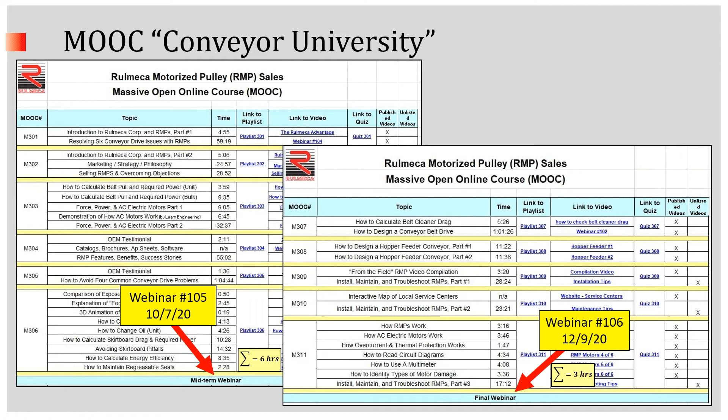That's one of our most popular videos. It's been watched tens of thousands of times. So we'll spend some time on hopper feeders. And then we will also go through what we call our install, maintain, and troubleshoot lecture. We'll have some highlight slides from that.

So the 7 items on our agenda are conveyor belt tensions and required power, how to calculate that, belt cleaner drag and required power, how to calculate that, 2 segments on hopper feeder drag and required power, and a few comments on how to calculate hopper pressure relief, and then 3 segments on installation, maintenance, and troubleshooting of conveyor drives.

And of course, since we're a manufacturer of motorized pulleys, we'll be using motorized pulleys in most of our illustrations through the hour. We start with a peek at

a standard conveyor to explore tensions. The tensions which are most relevant to today's talk are TE, also called effective tension, and T2, also called slack side tension. We are using the CEMA historical methodology in today's discussion.

Our company, as you most likely are well aware, is an international company with affiliates in 24 countries. At our company, our group headquarters in Italy, the fellows have developed a new methodology for conveyor power calculations based on both the DIN for our European colleagues, DIN standards, and the CEMA universal method that's based on edition 7 of the CEMA design manual.

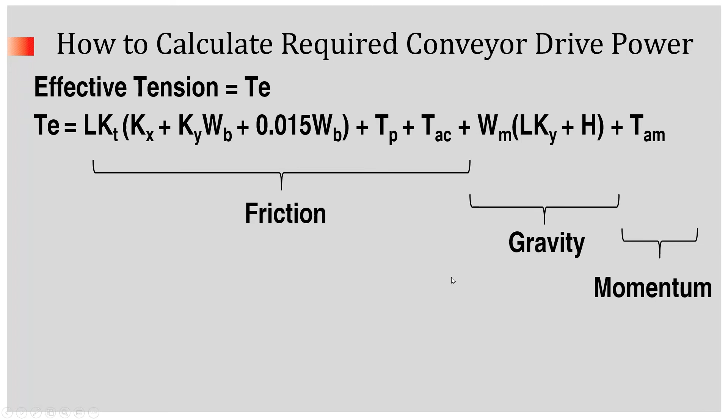Our program using the historical method is downloadable from our website. You can also have access to the universal method, which is an online portal type program available through the group anywhere in the world, and you can access it through our website.

Let's talk about T2, slack side tension, for the next couple of minutes. There are two types of T2 that need to be computed, one of which is T2 required to prevent slippage of the belt on the pulley surface.

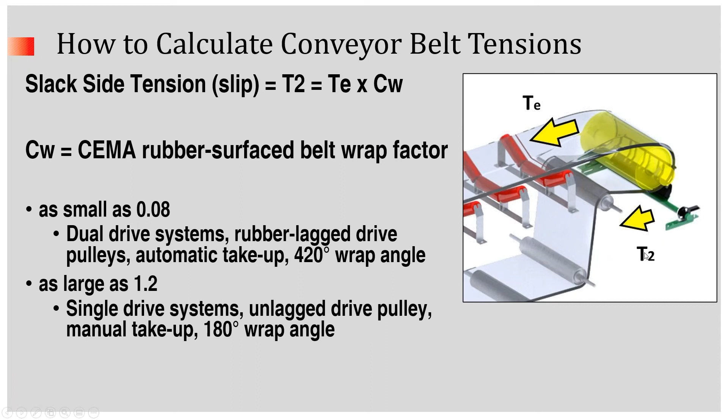This is the simplified equation here: effective tension times the CEMA factor. The CEMA factor can vary from a number as small as 0.08 to as high as 1.2. I won't go through the trouble of explaining all of that, but the CEMA methodology lets the user of the program be aware of what slack side tension is required to prevent slippage.

The other equally important slack side tension to compute is the one required to resist sag. You cannot allow the conveyor belt to sag beyond a small amount between the troughing idlers. Typically, the area of least tension is in the loading zone, and that's typically near the tail of the conveyor, as pictured here on the left.

If the sag is too large, then the problem would be spillage in that zone, and it could either be a nuisance, where you'd need to clean it frequently, or a disaster if it completely fills the tail section and stalls out the belt. So it's essential to calculate

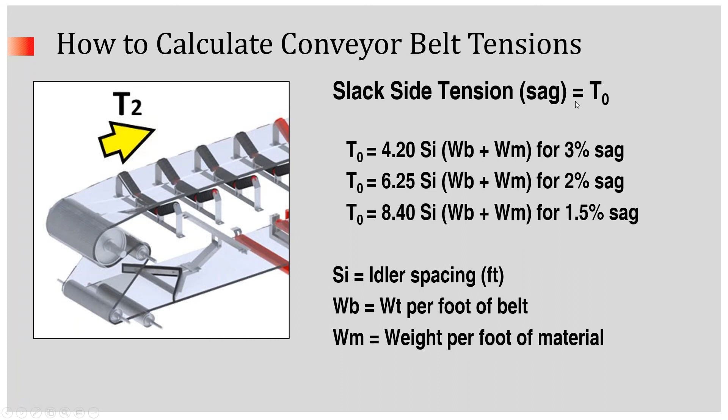T0, the tension required to prevent sag, and T2 is then developed, as you can see here. That's the sum of T0 plus the weight of the carrying and/or return strand of the belt for a sloped conveyor, and the tension required for the empty belt to overcome return idler friction. You either add or subtract depending upon whether your conveyor has an incline or a decline.

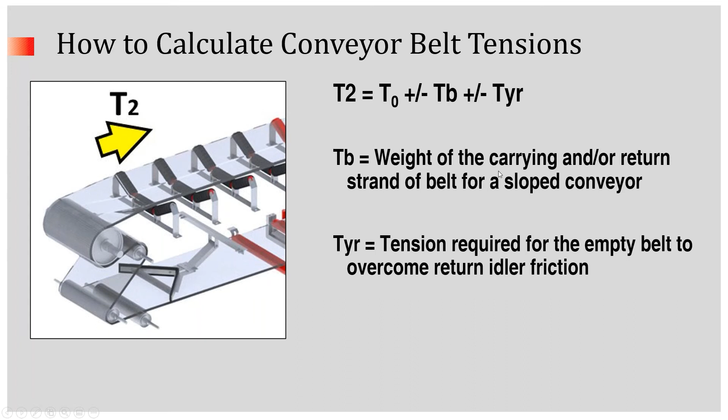Once we know each of the two T2s, the one to prevent slippage and the one to prevent sag, we select the larger of the two as governing, and we use TE to calculate power, as you can see in the top equation here. We know that TE, effective tension in pounds, multiplied by V, belt speed in feet per minute, comes out to be a certain number of foot-pounds per minute.

And since we know 1 horsepower equals 33,000 foot-pounds per minute, once we have the product of these two numbers, we know how much power to supply in the drive system.

To finish the discussion on the tensions, we select the larger of the two. Let's say, for example, T2 required to prevent slippage is 1,000 pounds, and T2 required to resist sag is 800 pounds. We would select the T2 of 1,000, and we would select a counterweight, which in this example would weigh 2,000 pounds, so that we can have equal and opposite force to the pulley in the counterweight take-up of 1,000 pounds.

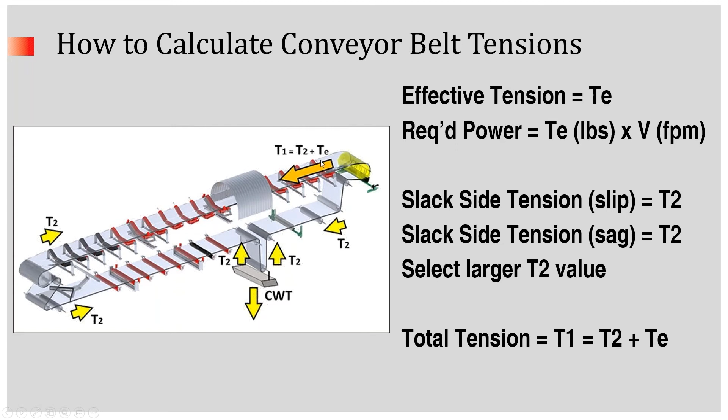So having 1,000 pounds scattered throughout the conveyor helps us with our slippage and sag problems. And we need to remember, when calculating T1, that T1 is the maximum tension in the conveyor belt. On an inclined conveyor such as this one, it's near the head. T1 is the sum of slack side tension plus effective tension.

Now for a couple of minutes, let's discuss one component of effective tension: the drag required to overcome belt cleaner pull. CEMA recommends the equation of the CEMA factor multiplied by the width of the blade times the number of blades.

They suggest that factors from as small as 2 pounds per inch of blade width to 14 pounds per inch of blade width could be used. If unknown, CEMA recommends using 5 pounds per inch of blade width.

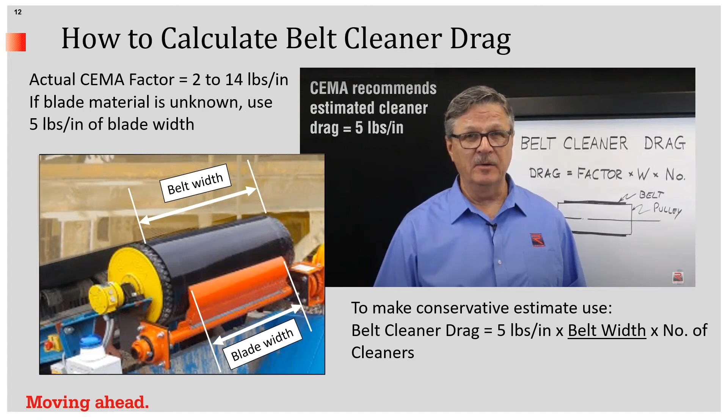Rulmeca suggests that to be conservative, you simply use 5 pounds per inch and multiply that against the belt width. Rather than, in our example on the left, you can see what might be a 30-inch wide belt and perhaps a 24-inch wide belt cleaner. Let's simplify things and multiply 5 pounds per inch against 30 inches of belt width, and multiply that product against the total number of cleaners installed. That's a simple and safe way to come up with the amount of drag you need to overcome in your drive system. Now let's turn our attention to 4 types of hopper feeders.

As I said, these hopper feeder videos, since we posted them a couple of years ago, have gotten thousands of views. So it seems there's a requirement for people to get guidance on how to do a proper calculation of a hopper feeder conveyor drive. We'll look at material storage, material blending, material receiving batch loading, and material metering.

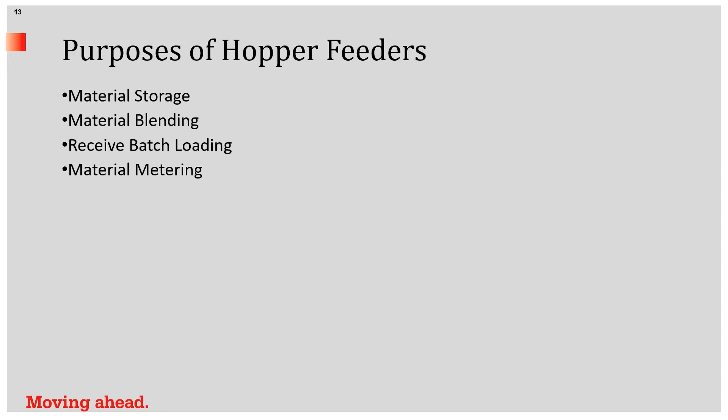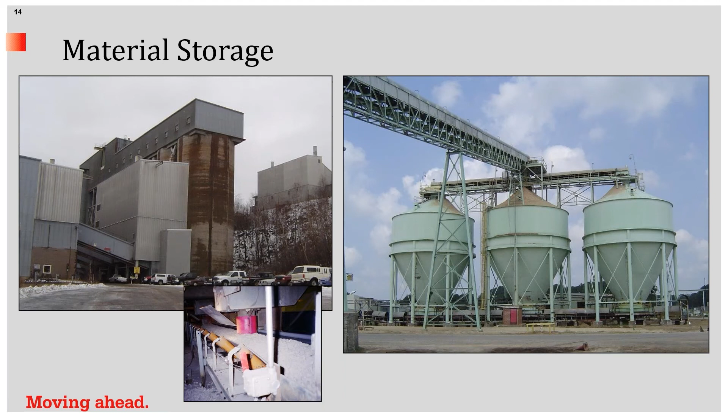These examples on the left show iron ore, and on the right, wood chips. The silos on the left and the hoppers on the right are simply vessels to contain material so as to have it on hand when it's needed in the process.

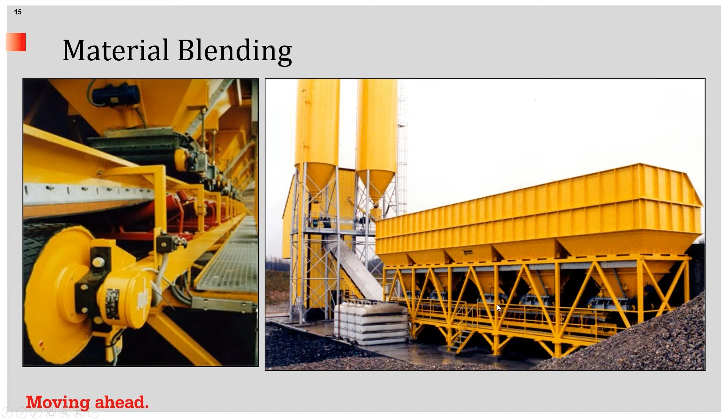This example shows material blending, and this is the sort of thing that might be seen in a typical batch plant along the side of a highway at a construction site. The various pant legs in this particular hopper might contain various grades of aggregate, different sizes of aggregate, different types of sand, and so forth, all of which can be blended together to make the recipe required to build the road.

And here we have examples of how a hopper might be used to receive batch loading. The example on the upper left shows the hopper is simply the intermediary between the batch unloading of this barge using a clamshell and the continuous takeaway by the dock conveyor. The hopper serves as the intermediate spot.

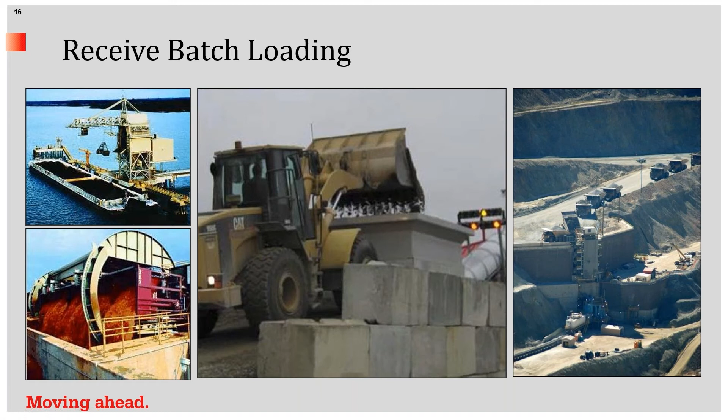Here's an example of a rotary rail car dumper dumping batches onto a continuous takeaway conveyor which is continuously withdrawing material. Likewise, a front end loader and truck dumps in a mine.

And finally, material metering. A hopper may be used to provide material at various rates. In this example, we have 2 motorized pulleys in service, each on a conveyor, which is tied in with an ultrasonic probe and a variable frequency drive. The ultrasonic probe sends a signal to the variable frequency drive, which then

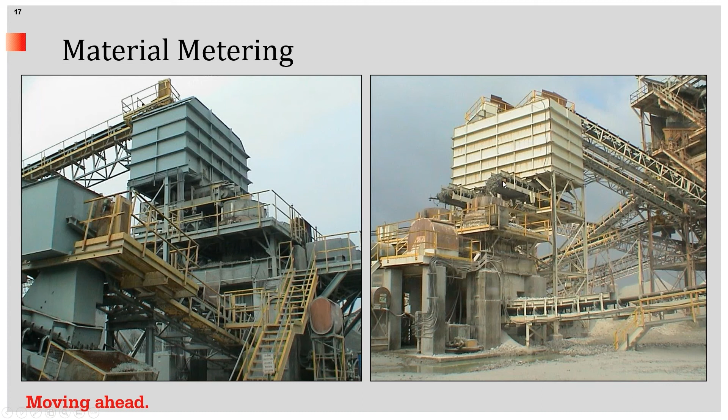in real time either speeds up or slows down the conveyor belt so as to choke feed the crusher. For optimal performance, the crusher is supposed to have the material at a certain level, and by metering the material from beneath the hopper, the operator can accomplish that.

Now let's draw an important distinction between two types of flow. One is continuous flow, and the other is metered flow. So I asked the question: if conveyor A is feeding conveyor B continuously, and conveyor A is handling 1,000 tons per hour with a belt speed of 100 feet per minute, and conveyor B has a belt speed of 200 feet per minute, what is the output? Is it 2,000 tons per hour?

The answer is no. The answer is 1,000 tons per hour, because in a continuous flow situation, the rate of material coming in equals the rate of material going out, regardless of the belt speed of either belt.

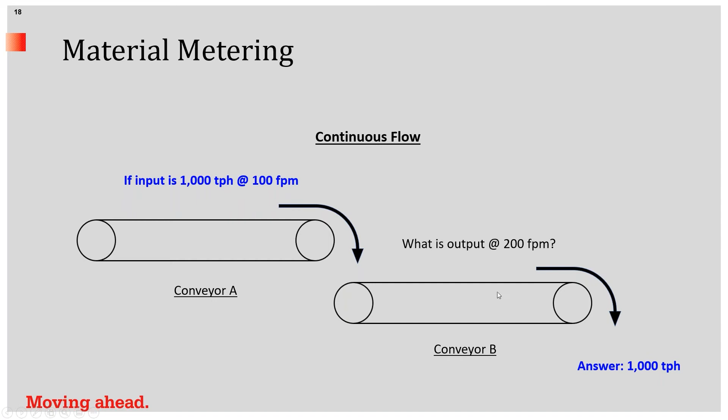However, when we look at flow from a metering hopper, assuming the output is unrestricted, if we start with an unrestricted output of 1,000 tons per hour on a 100 foot per minute hopper feeder conveyor, what would be the material handling rate if we speed up that conveyor belt to 200 feet per minute? And the answer is 2,000 tons per hour.

The handling rate is linearly proportional to the belt speed within certain considerations. If you make it 10,000 feet per minute, obviously it's not going to work. But within the normal parameters of conveyor design, conveyor handling rate and belt speed are linearly related.

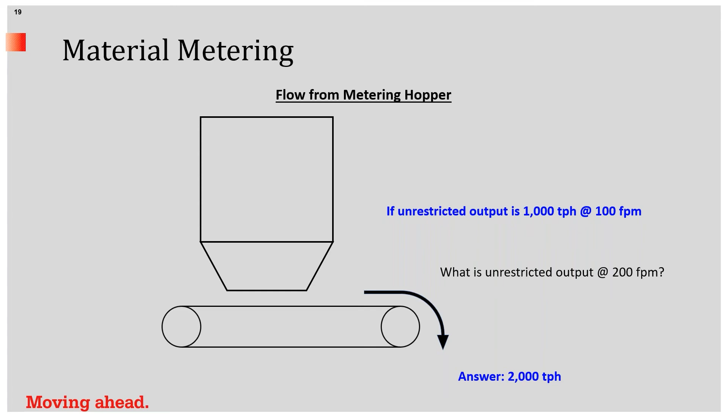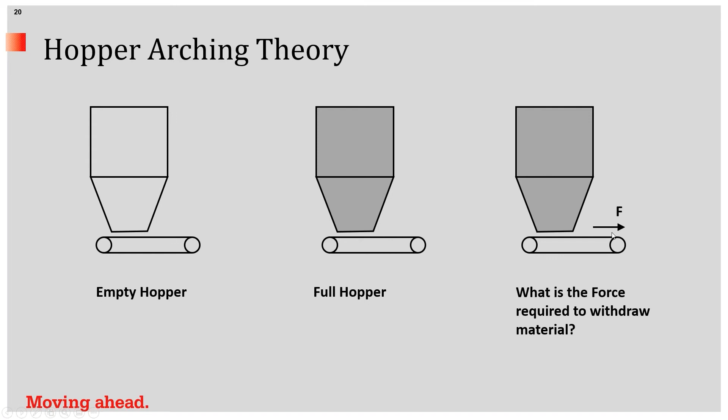Now let's take a more careful look at how we would come up with the force required to overcome the drag in a hopper. On the left, we have an empty hopper. In the center, we have a full hopper. Our objective is to calculate F, the amount of effective tension that the drive needs to supply to the conveyor belt to overcome drag within the hopper.

In order to accomplish this, it's essential to understand the concept of arching theory. Arching theory tells us that we only need to concern ourselves with the active volume of material in the hopper, assuming that all of the rest of the material will be self-supporting. In other words, the inclined hopper walls are going to be holding up most of the material.

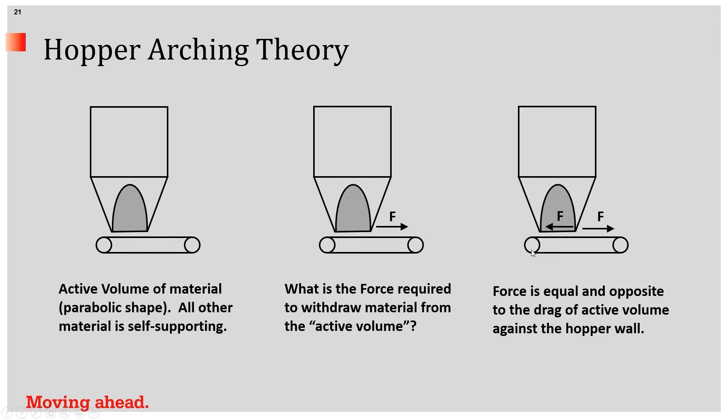So what is the force required to overcome the material in the active volume? Let's have a look at how to calculate that. We simplify this technique by saying, rather than attempting to calculate the volume of a parabolic shape, we simply approximate that shape with a prism, meaning a rectangular shape.

We say that the volume of the prism is defined by its width, its length, and its height, and we always assume that the height is 3 times either the width or the length, whichever is smaller. Once we calculate this active volume in cubic feet, and we know the bulk density in pounds per cubic feet, we know the weight of the active volume.

And then comes the secret sauce. We simply apply a factor of 0.5 to approximate the cutting force required to overcome that active volume. So first we calculate the volume, determine the weight by multiplying by bulk density, and then multiply that weight by 0.5 to come up with, in imperial units, the number of pounds that the conveyor drive must supply to overcome the drag.

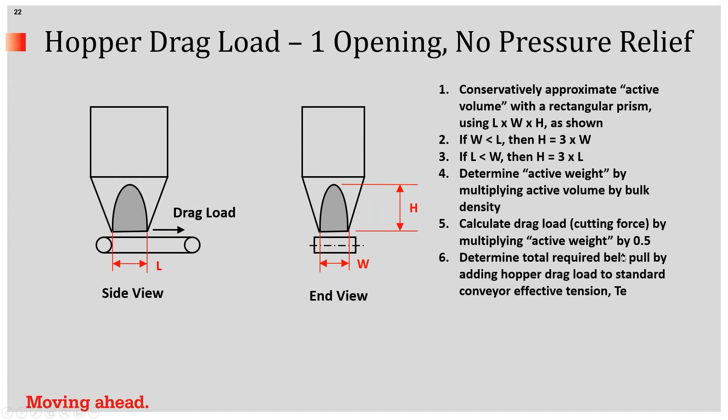A very important concept to understand is pressure relief. It is possible to decrease the amount of power required to drive a hopper feeder conveyor simply by restricting the opening. Of course, it would be a problem if it was restricted too much and it would plug, so a certain amount of reason needs to be used when figuring this out.

It's exactly the same as before. We simply assume that the length equals the length defined between the hopper edge and the tent, and the width, in this case with one tent installed, equals the width without the pressure relief, and the height is simply 3 times either the length, L prime, or W, whichever is smaller.

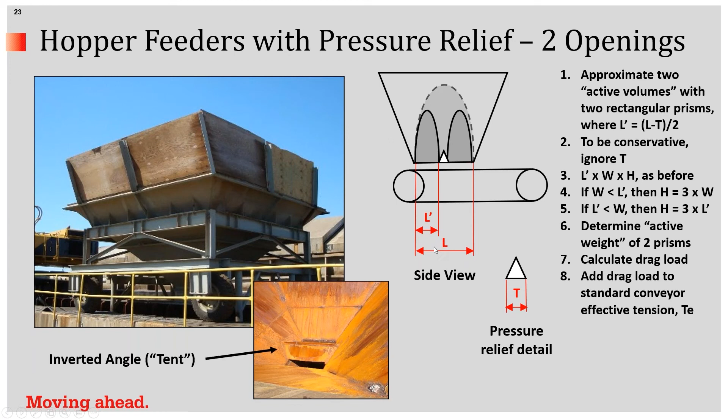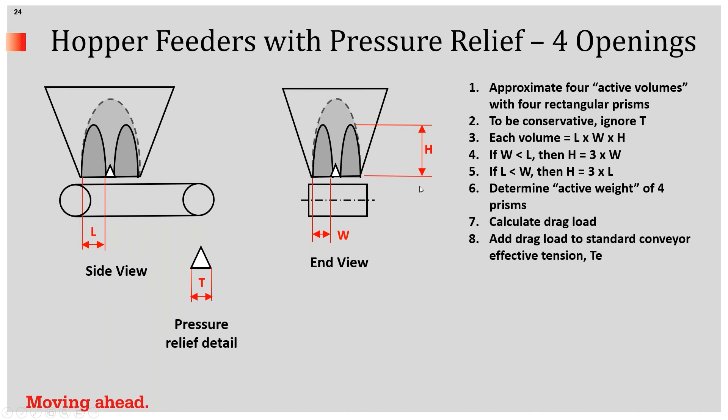Once we know the volume, we can calculate the weight, and then use the 0.5 factor to figure out how much drag is required. The same concept can be used to change a single hopper opening into a 4 opening hopper. Keeping in mind that the height is 3 times the smaller of the width or the length, when we can reduce the height by changing the width or length dimension, that's the trick to reducing the amount of drag that a hopper would be placing on the hopper feeder conveyor.

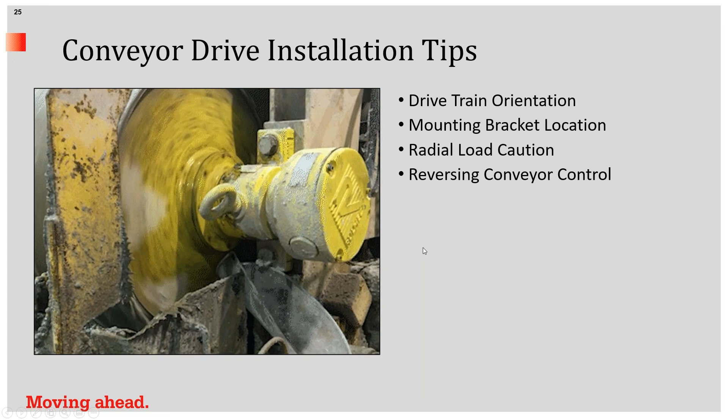I realize that was very quick, and I'm trying to compress into a few minutes what our video takes 20 minutes to explain. Now let's turn our attention to some conveyor drive installation tips. We'll look at 4 of them: drivetrain orientation, mounting bracket location, radial load caution, and reversing conveyor control caution.

When considering the installation of a Rulmeca motorized pulley, it's essential to realize that there is an up and a down. Our smaller pulleys are stamped with the word UP on the shaft to indicate the 12 o'clock position. If we imagine the pulley as the face of a clock, the up should be either at the 12 o'clock position or at the 3 o'clock position, defined by the direction of the belt. So if the direction of the belt, as you can see with my arrow here, is toward 3 o'clock, then it's perfectly acceptable to put the up indicator in the 3 o'clock position.

It's not acceptable to put the up in the 9 o'clock position, and it's not acceptable to invert the motorized pulley. These are all the small pulleys, 16 inches in diameter and smaller, and the 4 circles at the bottom, this, by the way, is extracted from our installation guide. Our cast iron brackets, which are the 360-degree cast iron brackets, also have the same restriction.

We don't stamp the word UP on the shaft anywhere, but these pictures show which is correct and which is incorrect. To mount a motorized pulley on a vertical surface, it's no problem if you do it in this manner. To mount the pulley on a horizontal surface, this manner would be just fine.

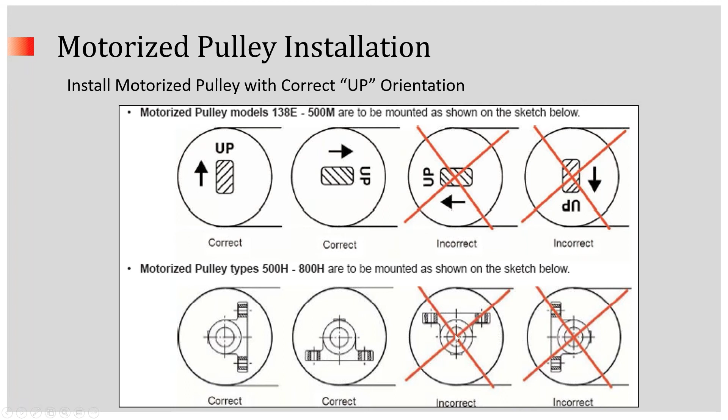There are two important things to remember. On the left is a cutaway drawing of one of our smaller motorized pulleys, this one happens to be 16 inches in diameter. On the right is a cross-sectional diagram of one of our larger ones, 20 inches or larger, this happens to be 24 inches. Notice both are in the correct configuration, in other words, the up arrow is in the up direction.

Notice in a small motorized pulley, the gearbox is down in the oil, and as I mentioned before, you can incline it 90 degrees, and that would mean the gearbox is half out. However, in the case of the big motorized pulley, when it's mounted correctly, the gearbox is up out of the oil, and it's also permissible to have it half in.

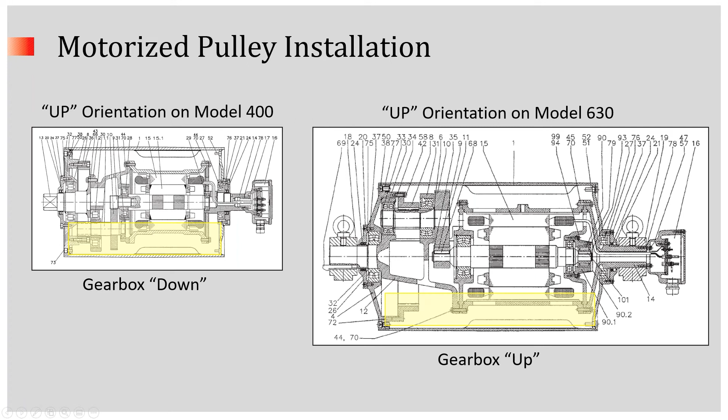We've learned over the years that it's essential to configure these gearboxes in this way so as to prevent frothing of the oil. And you don't need to worry about this gearbox running dry because the geared rim is like a water wheel, pulling oil continuously up to lubricate all of the teeth and all of the bearings in the box. Here's another thing to keep in mind when thinking about proper drive orientation.

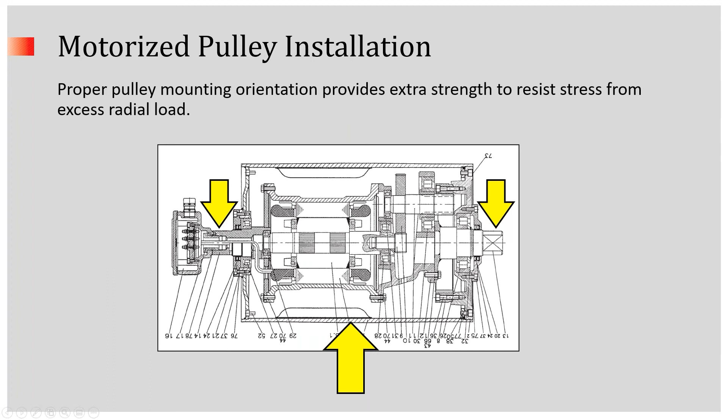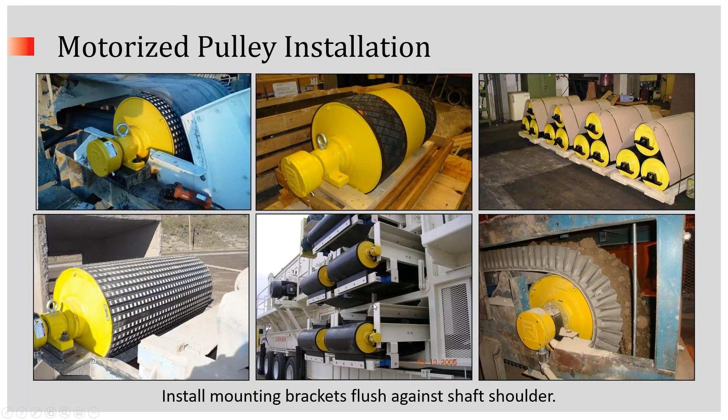Let's have a look at several mounting orientations. Here we have a large motorized pulley mounted on a horizontal surface, another horizontal surface, and here we have our smaller pulleys, in this case mounted on a vertical surface, and on a horizontal surface here.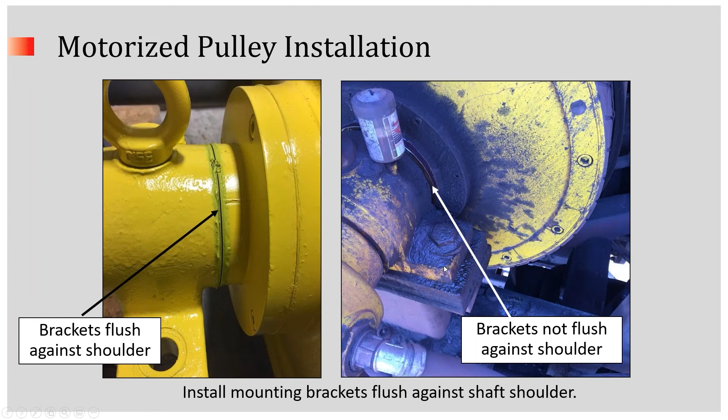Let's talk a bit more about what I mentioned briefly earlier, and that is radial load. Radial load is the vector sum of the belt tensions which act on a motorized pulley. We described T1 previously, and you may remember that T1 equals effective tension plus slack side tension on the carrying strand. To that, we must add T2 on the return strand to come up with a vector sum, which looks like this, equal to T1 plus T2. A simple number to calculate and a very important number to double check so as not to allow any drive system to be overstressed.

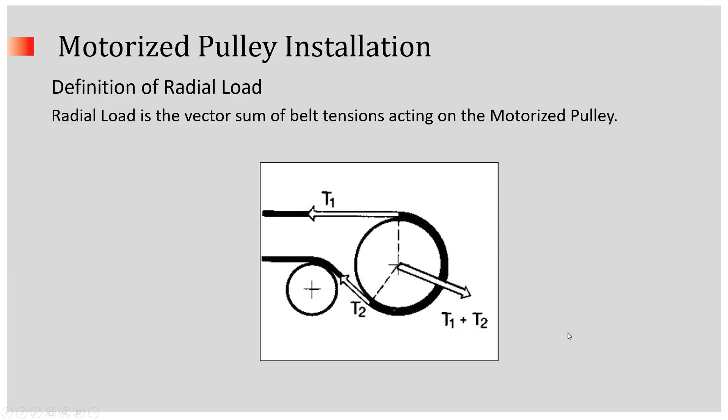Here's an example of an idler pulley which was overstressed. This one was purchased and installed, it happens to be our 500L idler pulley, and it has the capability of withstanding a radial load of 10,000 pounds. And it failed very quickly because it was incorrectly installed on a bucket wheel reclaimer in the discharge position, and the actual radial load was 18,000 pounds. So the fix to this problem was to install the right thing, which in this case happens to be our model 630 idler pulley.

A good example of radial load failure. Notice that the failure mode was the lagging came off in no time, and the bearing housing broke off. The weld between the bearing housing and the end housing failed.

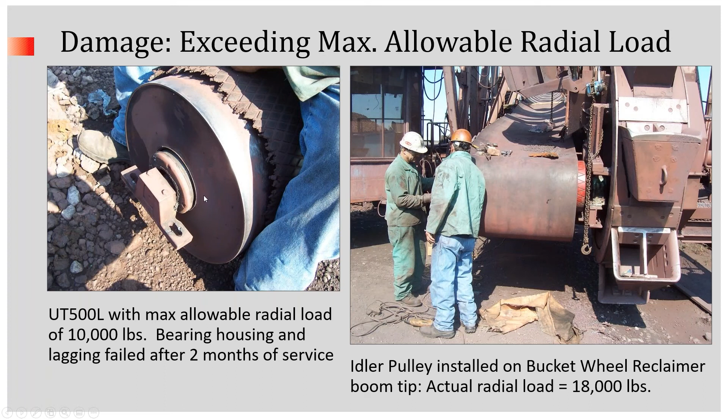I hate showing pictures of damaged pulleys, but how can we learn if we don't look at damage? We can learn how to avoid damage by looking at past problems.

This is an example of a Model 630 installed in a shuttle conveyor, a reversing conveyor handling iron ore for a 60-inch wide belt. It charges the storage silos you saw previously. A soft start or variable frequency drive were suggested, however, not installed. Unfortunately, the conveyor was not brought to a complete dead stop before reversing direction, and the result was a torque side torsion failure of the shaft, pictured here in the gearbox, attached to the gearbox.

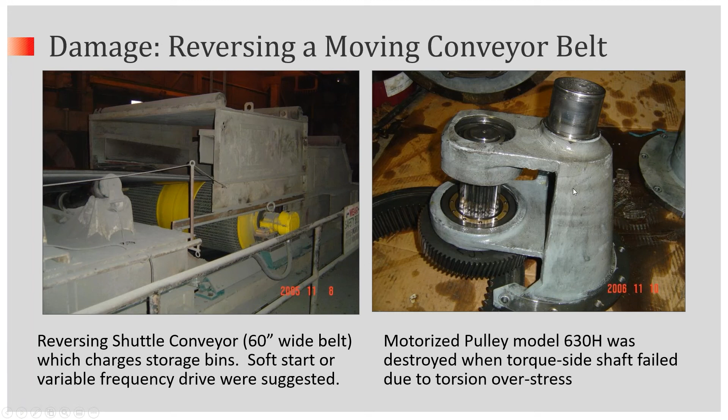Torque side shaft failure occurred when the conveyor direction was changed without bringing the speed to zero in between changes.

Let's turn our attention to a few maintenance tips. We'll be exploring external temperature monitoring, current draw monitoring, vibration analysis, tribology, and a couple of minutes on what we think will be a growing idea, which is internal temperature monitoring.

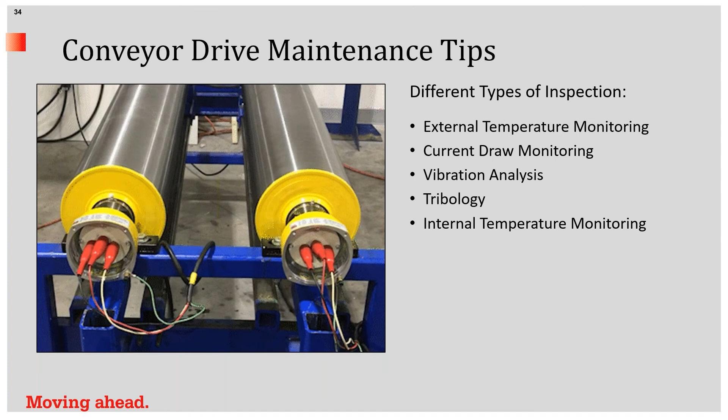External temperature monitoring can be crude, easily done, on whatever schedule the operator thinks is best. We recommend that if a laser thermometer is used, the external temperature be measured at the midpoint between the shaft and the pulley lagging. This is the spot of highest temperature on the external surface of the motorized pulley.

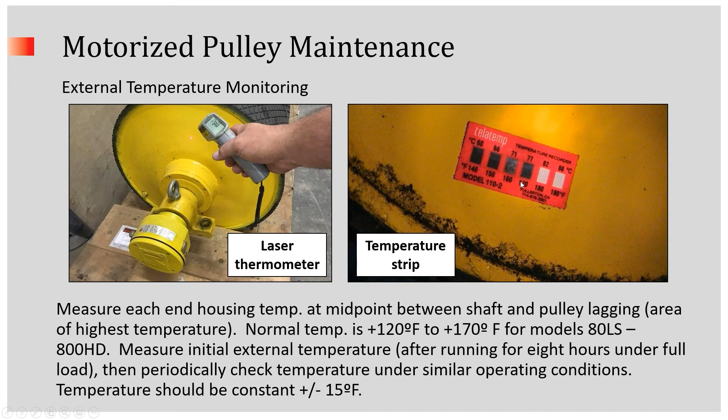A temperature strip can be used. Here you can see one affixed to a motorized pulley. A temperature strip is nothing more than a device which stains itself at the maximum temperature achieved. So if an operator were to look at this temp strip once a month and sees every month it's staying at 170, that's a crude way of making sure the temperature is behaving itself. By the way, 170 is no problem for a motorized pulley. If, however, the operator were to come out and see it stained at 180 or 190, whereas it's been 170 for 6 months, this is an indicator that there's a problem which should be explored.

External temperature monitoring can also be done using infrared spectrometry. Some of you may be well acquainted with this, in fact better acquainted than we are, and some may not. For those hearing this for the first time, infrared spectrometry is a great way to look at what's happening externally on the motorized pulley, to come up with some conclusions about what might be happening on the inside. The way the spectrometry picture works is the lowest temperature shown, dark blue, in this case is 88 degrees Fahrenheit. The highest is 140 degrees Fahrenheit, shown in white. That tells us the bearing housing in the center of the end housing was the maximum here, at 140 degrees Fahrenheit when it was checked.

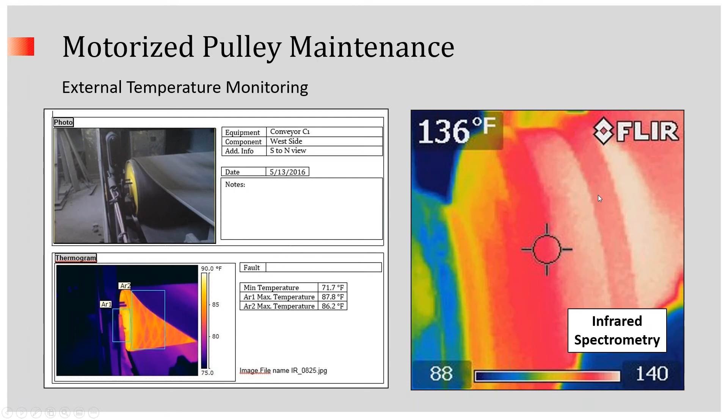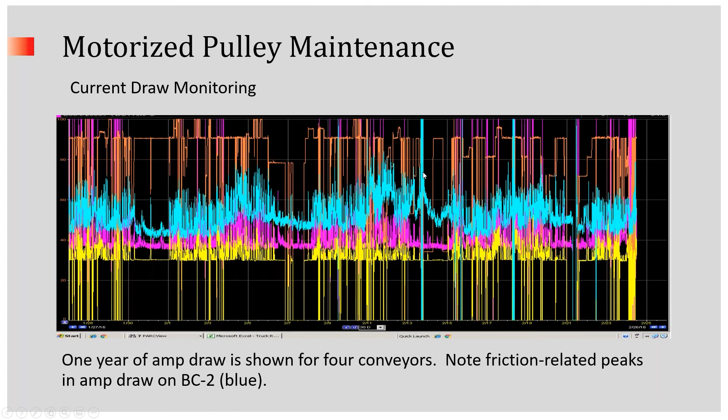Now I'd like to turn our attention to vibration analysis. This picture shows two great spots where a transducer can be fixed from time to time. In other words, it can be permanently attached or attached as needed. We're coming to a case where a transducer was attached on a monthly basis in this location here. The point is to have a consistent spot for the transducer to rest so that consistent readings would result.

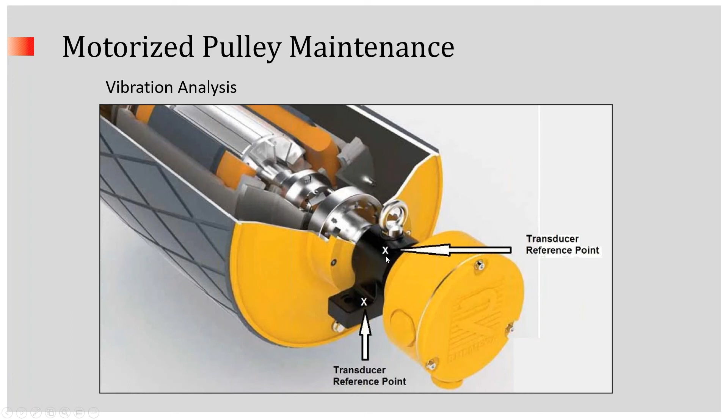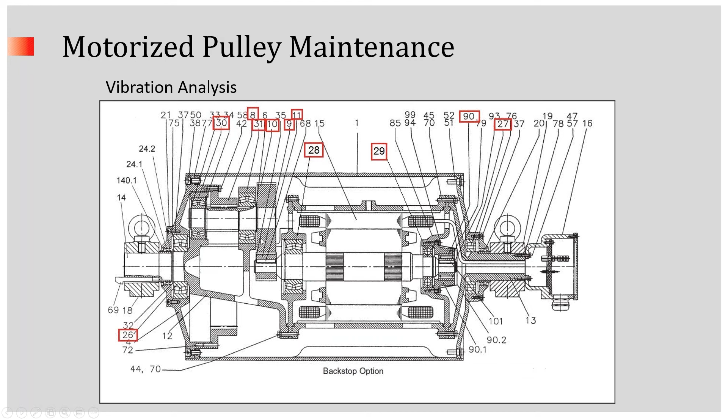This cross-sectional diagram shows the items within the motorized pulley which will cause vibration, consisting of a certain number of bearings and a certain number of gears, marked in red. When requested by customers to prepare their motorized pulley for vibration analysis, we provide this kind of data. We don't ordinarily provide this amount of data with a motorized pulley, but would be glad to do it when we know a customer wants to set up for vibration analysis. Look, for example, drawing position 9 happens to be the rotor pinion, which consists of a 23-tooth gear in this particular one.

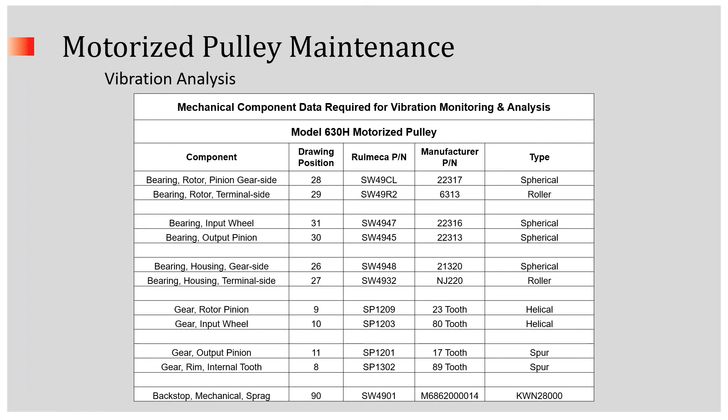The input wheel, on the other hand, is 80 teeth. A vibration technician would be able to understand the relationship between the number of teeth in a gear, or the number of rolls or balls in bearings, and the vibration signature.

Here you see shown on the left a diagram of 2.5 years of vibration monitoring, which was done on a monthly basis. On the right, you can see the spot where the transducer was consistently affixed on a monthly basis on our model 630, on a model 800.

What I'm trying to show here is that after 2.5 years of consistent readings, a trend was observed on one of the amplitudes. The amplitude increased on a certain frequency. In other words, we saw an unusual behavior of the amplitude on a particular frequency, indicative of some sort of a problem.

Actually, using vibration analysis, this pulley was pulled out of service, a spare was put in, and the pulley returned to us here at Wilmington, North Carolina. Upon disassembly, we discovered that the load on the pulley was so much less than was originally intended. The bearing was too strong, and the fix was to put in a different type of bearing in which the load would be more matching to the design of the bearing.

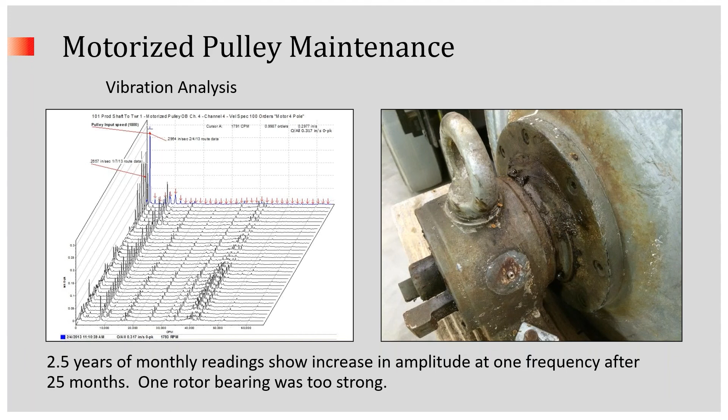The bearing that was installed originally was so strong that after 2.5 years, the rolls began to slip rather than roll. That, of course, is a bad thing for a bearing.

And our last bit of maintenance technology I would like to show you is here. On the left, you're looking at some infrared spectrometry, and on the right, a graph which depicts internal temperature of a motorized pulley. This was a particularly challenging application because what you're seeing on the left is a hopper being charged with 25 dumps in a 5-minute cycle.

Hot material, you can see how hot it is, 120 degrees Fahrenheit. So hot material was being charged directly onto a hopper feeder conveyor, 25 dumps in 5 minutes. The conveyor is withdrawing the material out of your monitor, so imagine the material is coming into your direction very slowly at 2 feet per minute.

And the full complement of material would be dumped in approximately 20 minutes. So 5 minutes to fill and then 20 minutes to empty at 2 feet per minute. And we were all concerned that the pulley might not be able to cool itself. Beyond the scope of this slide is the fact that we recommended an external air plenum to blow air over the face of the motorized pulley.

The point of the slide is to show you that over time, we were monitoring internal temperature. In 5 minutes, the temperature of the stator would increase as the conveyor belt was completely filled. And then in the next 20 minutes, the temperature would decrease as it was slowly discharged, only to be filled again in 5 minutes and then emptied in 20 minutes.

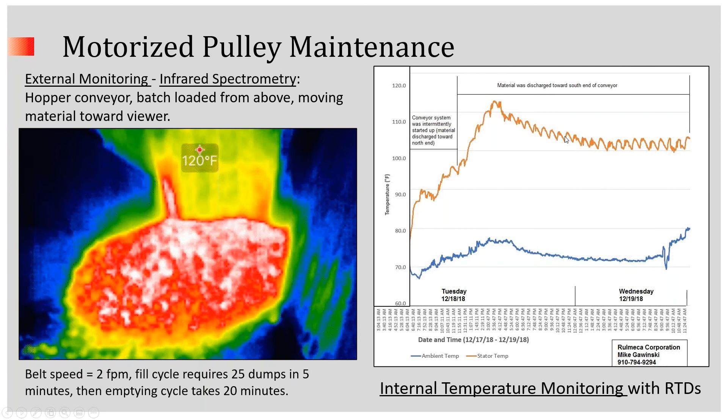The internal temperature of the motorized pulley can easily hit 240 degrees Fahrenheit with no problem, plus or minus 20 degrees, with no problem.

Now, I'd like to spend some time discussing electrical installation and some troubleshooting tips. We'll look at the relationship between power and full load amps. We'll look at overcurrent plus thermal protection, and then have a peek at some burnt motors.

This graph allows us to focus and maybe see the numbers better on the model 220 to 500. As a matter of fact, our example later is going to be on this exact model, which is our model 400. You can see model depicted on the right-hand y-axis, model 400. A model 20 horsepower, amps and horsepower is on the left.

So 20 horsepower, model 400 draws 23.5 amps. Notice also that this particular 20 horse model has a no-load amp draw of approximately 12.5 amps. So a lot of stuff is shown on this graph. The point of it is the direct relationship between power and amp draw.

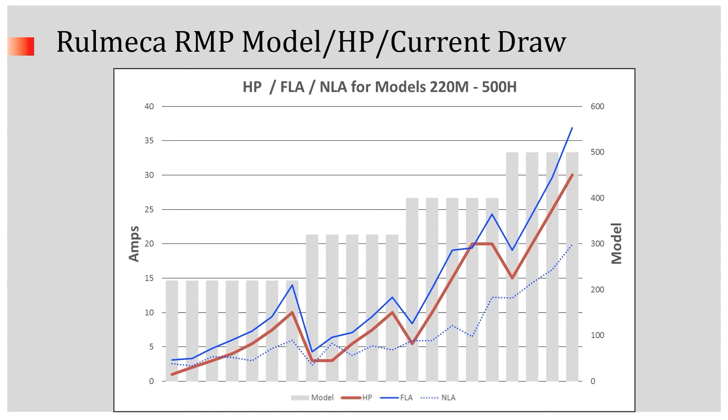An AC squirrel cage induction motor, 3-phase, is not capable of protecting itself from self-destructing. So if a 20 horsepower motor is installed and 20 horsepower is required, things should be copacetic. However, if the conveyor requires more than 20 horsepower, that motor will attempt to provide more power. And the only way it has of attempting to provide more power is by drawing more current. And current is the enemy. When current exceeds what the motor is designed for, that's where a problem comes in.

So let's talk about how to protect the motor. We build all of our motorized pulleys with thermal protection switches in the stator head. Here's one of the three.

And all AC motors, of course, need to be protected with a current overload switch. On the right, you'll see a current overload switch with a variable overcurrent setting. So let's just say we have a motor which draws 4 amps, full load amps of 4. So this would be the correct setting.

If that conveyor, after a few weeks or months, decided to trip out every once in a while, it would be a terrible idea to change the overcurrent setting to 5 amps or 6 amps, because you're negating the overcurrent protection that motor needs.

If the full load amps are 4, that means the motor is designed to carry 4 amps continuously. It can carry in excess of 4 amps. As a matter of fact, any design C AC squirrel cage induction motor is going to have an inrush current of 6 times FLA at startup for a few seconds. However, to change the overcurrent setting from FLA to some higher number is a terrible idea, because the motor cannot sustain above FLA indefinitely.

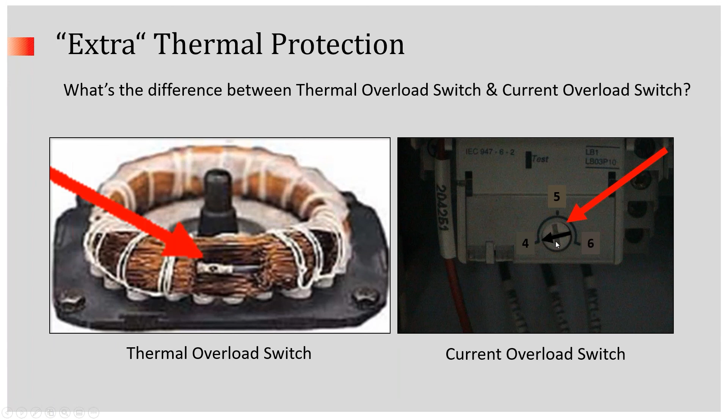This is the overcurrent protection switch, which should pop open if FLA is exceeded. If current flow exceeds FLA, the switch will open and automatically cut power, in this case 3-phase power, to the motor.

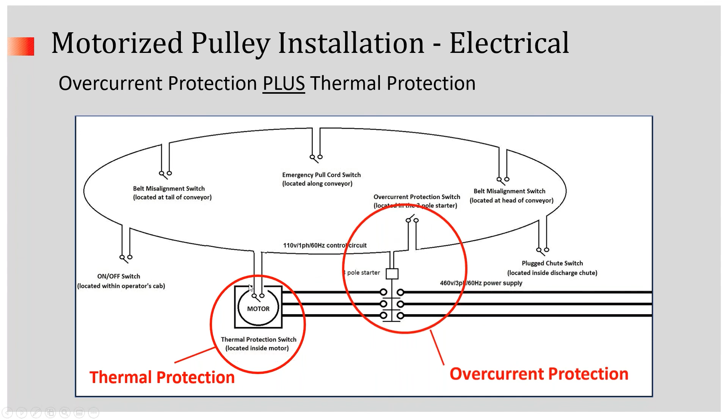Also shown on this diagram, and this is our sermon for the day, we strongly believe that our thermal protection switches should be wired into a normally closed control circuit. It is possible to drive a motorized pulley without connecting the built-in thermal protection switches to a control circuit, but we would say it's a bad idea because it's giving you an extra layer of protection. Overcurrent protection is one thing. Temperature protection is something completely different. And to take advantage of what we offer is something we certainly recommend.

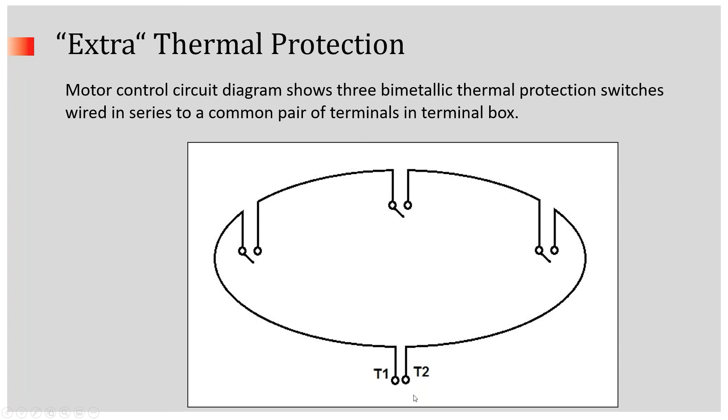This circuit diagram shows nothing more than 3 thermal protection switches wired in series in the stator head, brought to a common pair of terminals within our junction box.

And this is what the thermal protection switches look like. In the background, you can see a stator head.

And this is what a motor looks like when it has been stressed, when it has been overloaded. Uniform burning, all phases are burned.

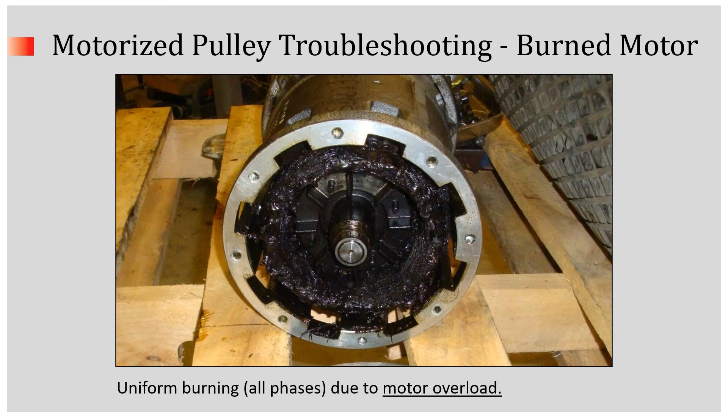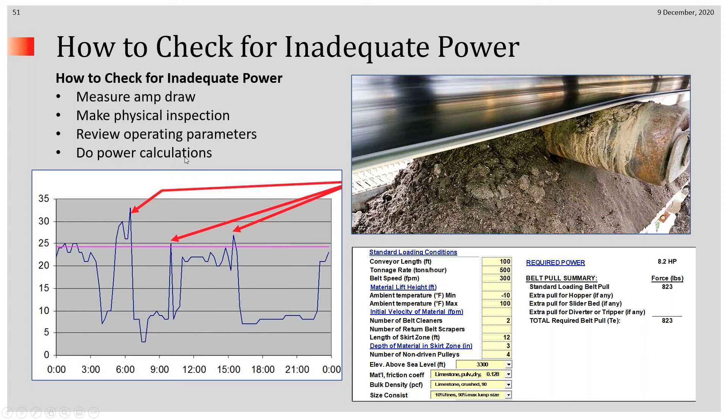If we have a situation with inadequate power, we should measure amp draw, make a physical inspection, recheck the operating parameters, and if necessary, do power calculations over again.

A variety of things can happen over time. You can have accumulated carryback under idlers. Belt cleaners may have been added. I talked previously about a belt cleaner adding drag to a belt. If a conveyor was originally designed to have one and an operator decided to put in 3 to clean it better, that doesn't happen for free. It's possible that more power is required.

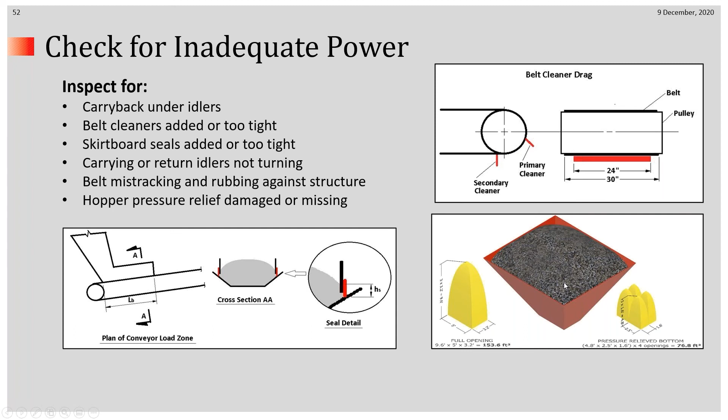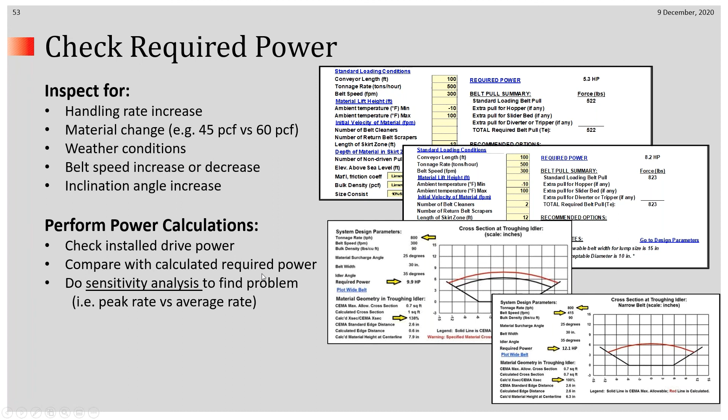Other things to check for in the case of an overloaded motor: did you increase your handling rate? Are you now handling 2,500 tons per hour, whereas previously you were planning on 1,500? Or did your material change? Did you go from handling coal to a more dense product like rock or iron? Did weather conditions change? Did you relocate a system developed for warm weather to a cold area, where belts are harder to turn in winter and cause more power draw? Did you change your belt speed? Did you change the inclination angle and so forth? These are all things that should be checked, and all were covered in the second semester of our training.

Now let's have a peek at a motorized pulley which was supposedly too weak. We were told, years ago, that a 20 horsepower motor was too weak. So with the permission of the operator, we installed a current monitoring device. You can see over this 24-hour period, this 20 horsepower Model 400 3-stage model was permitted to exceed FLA repeatedly for extended periods of time. It would be no problem if 23.5 or 23.6 amps was exceeded for a few seconds to start up the conveyor every few hours, but notice it was allowed to exceed it for extended periods of time.

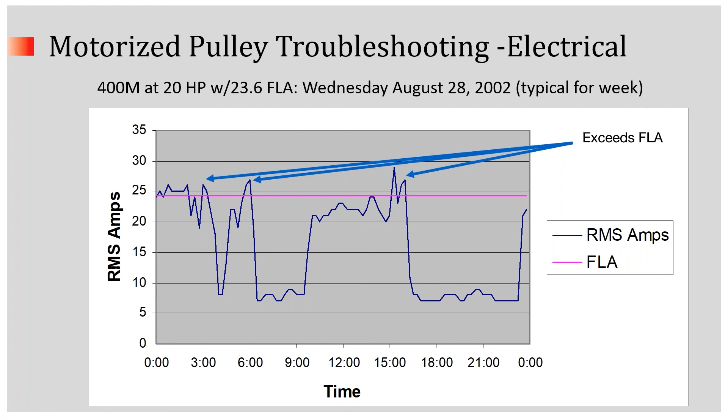And the result was what you saw previously: a uniformly damaged motor from overstress. In other words, installing a 20 horsepower motor where something different was required. And yes, the correction to the problem was the installation of a 25 horsepower conveyor drive.

Here is a picture of a different type of motor damage. The purpose of showing you this - we have plenty of examples, but this is the last one I'm showing - when we take these things apart, it's not difficult to diagnose what the problem may have been. This is certainly not an overloaded motor because the burn is concentrated in one area. This localized burn would be typical of overvoltage, something that could happen due to a lightning strike, or if a VFD was controlling the drive and its output wasn't filtered, causing a resonance-induced voltage spike between the VFD and the motorized pulley.

On the right, you'll see what the stator should look like, and on the left, you see what it looks like when you zap a 230-volt motor with a 460-volt power supply.

I hope you don't feel rushed. I know I talked quickly, but I tried to cover the essence of what our second semester included. I talked about belt tensions and calculating required power. We talked about belt cleaner drag, some features with hopper regarding arching theory, how to calculate drag, how to relieve that drag by installing pressure, and some installation, maintenance, and troubleshooting tips. At this point, I'm going to ask Brian, Steve, and Zach if you guys have been addressing any questions or comments as I've been speaking.

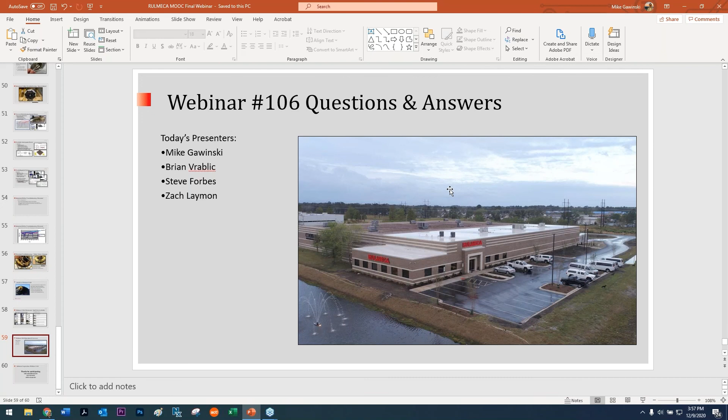There's another question about torque, and whether we calculate the torque requirement. In general we don't calculate a torque requirement so to speak. What we calculate is a belt pull, and we convert that belt pull, which comes to us in pounds, because if you drill down through the CEMA calculations, they are assigning a certain amount of drag in pounds to each component of the system. So we convert that drag in pounds to belt pull, and we convert that belt pull to horsepower, because we know that 1 horsepower is always 33,000 foot-pounds per minute.

And so if we know how many pounds we have, and we know how fast we're going, we can tell you how much horsepower you're going to need. So if we know how many pounds of drag we're going to need at the head, and we know how fast the material has to move, then we can convert that into horsepower.

We don't necessarily work in torques, as I like to call them. Just to add on to what Brian said, since CEMA talks about belt tension, and it's a convenient thing for conveyor designers and users to understand, we know tension is expressed in pounds in imperial units, and everybody talks about belt speed because that's going to affect the rate. As Brian said, pounds times feet per minute equals horsepower, because 1 horsepower equals 33,000 foot-pounds per minute.

Once we start talking about torque, and I was doing this 27 years ago and I stopped, because when we talk about foot-pounds of torque, we have to talk about what's the diameter of the pulley, what's the RPM of the pulley. And we talk about a whole different spectrum of things, which frankly are unnecessary, because conveyor designers care primarily about so many feet per minute of belt, and a certain belt tension within the belt.

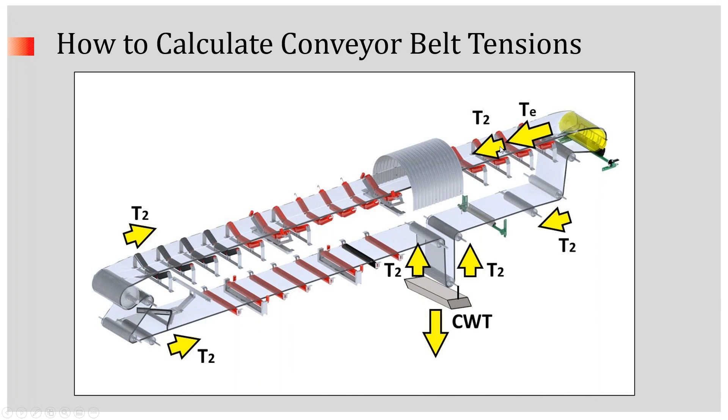Remember, I mentioned earlier that T2 plus TE equals T1. T1 is the magic number that the conveyor designer needs to calculate in order to buy the belt. So we're talking pounds of belt and feet per minute of the belt. Torque only complicates things. You can do it, but it adds complexity rather than removing it. So that's my 2 cents worth.

That information that we just talked about in terms of belt pull and those calculations are also available on our website, the same place you would find the horsepower calculator. We explain that in a lot of detail, giving you all of the literal calculations that you need, and you can go into the minutia. And if you download our horsepower calculator, the CEMA horsepower calculator, we actually call out the components and how each of those components look, so there's a lot of good information in there to study.

On that subject, feel free to grab the software that Brian mentioned. It's free. One of our webinars, webinar 102, rather than trying to use my memory, we look at together. Webinar 102 is 1 hour and 1 minute on how to use that program. So I draw your attention to 60 minutes of how to use the CEMA historical methodology using the downloadable software.

Eventually, we're going to have a webinar put together on what we call the RCS, the Rulmeca computational suite, using the universal method. But for now, we know the tried and true historical method works. It's worked for a very long time. And that 1 hour webinar will help you through it.